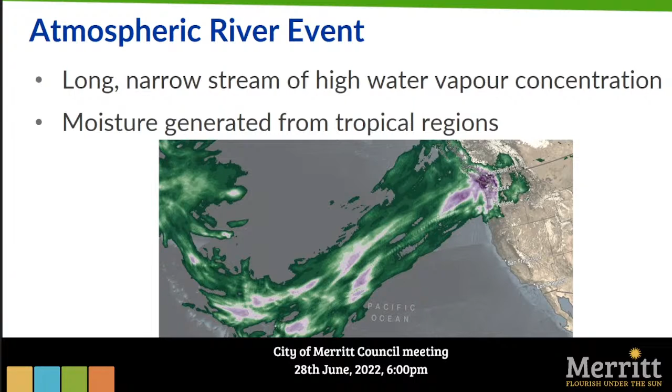There's a recent study from BGC Engineering which is supporting something in that range, and that was the original published value from Water Survey. But since that time, they've reduced their estimate. We've reached out to them to try and find out a little bit more information. We haven't had a response, but all I can say right now is that that's not their final data. So in the future, they will be updating that. Thank you.

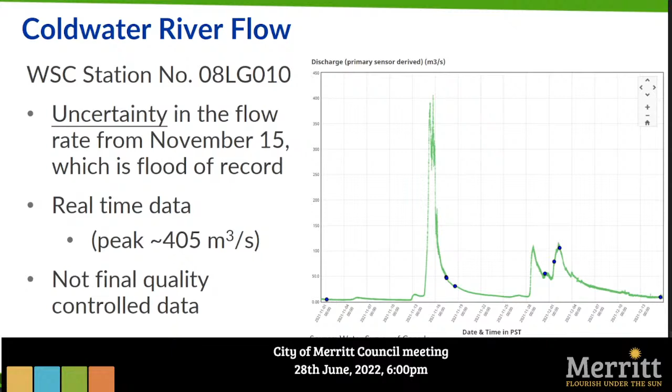Just waiting for this to, sorry, there's a little bit of an online lag, I think.

So even further downstream towards the confluence with the Nicola, that avulsion channel exposed the FortisBC gas main. So this is a critical piece of infrastructure that supplies gas to the entire city. So there were risks associated with that exposure. FortisBC had to come in and do some emergency work. We provided some support and advice on that as well.

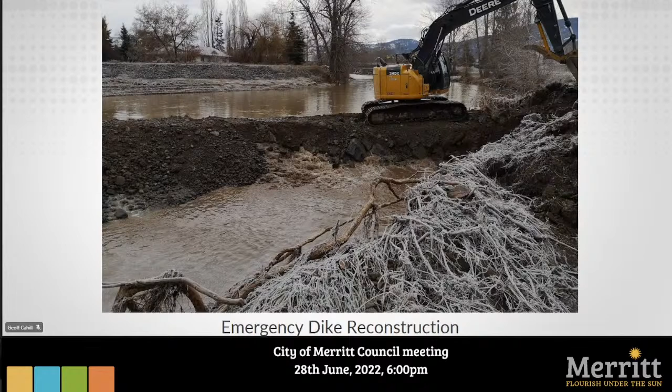So just a quick summary of some of those impacts. So you're obviously all aware of this, but there was widespread overland flooding in the city. There were damages to the water and wastewater systems. There were dike failures, bank erosion. Obviously, there was the bridge collapse. There was extensive damage to properties and buildings, temporary loss of services to the community, and there was an incredible amount of effort put into the emergency response, which I was fortunate to be a part of. And that all led to, obviously, right after November 15th, that evacuation order for the entire city of Merritt.

So just some of our project objectives that we've talked about internally and with the city team. So we want a flood mitigation plan that's going to be robust. We want to have robust flood protection for the future and reduce future flood-related risks in the city. We want to have low capital costs and low operation and maintenance costs. I think the operation and maintenance component is a big consideration, because this is going to be a large piece of infrastructure that the city owns permanently. We want to limit impacts to property as well as to the environment by building this new infrastructure.

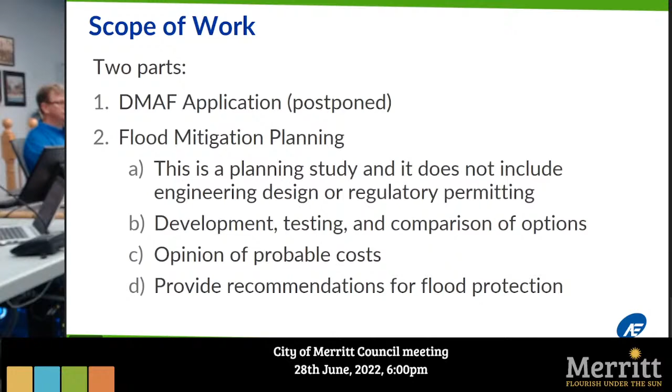So just very quickly on our particular scope of work. So we had 2 parts. So we were looking at funding. So DMAF is an acronym for Disaster Mitigation and Adaptation Fund. That's through Infrastructure Canada, and I'll talk about that just in a second. But then very much related to that is flood mitigation planning. That's what we want to talk to you about today. So this is a planning study.

It's really important. I think Darcy indicated that at the beginning when he introduced me, but it's really important to highlight that, and we're looking at the development and testing of different options that we can consider to implement flood protection in Merritt. Related to that, from the engineering side, we want to come up with an opinion of probable cost. How much is this going to cost to build? And then ultimately, following this presentation and the open house tonight and some of the feedback that we get in the coming days and maybe the next couple of weeks, we want to come up with what our preferred solution is and put that forward.

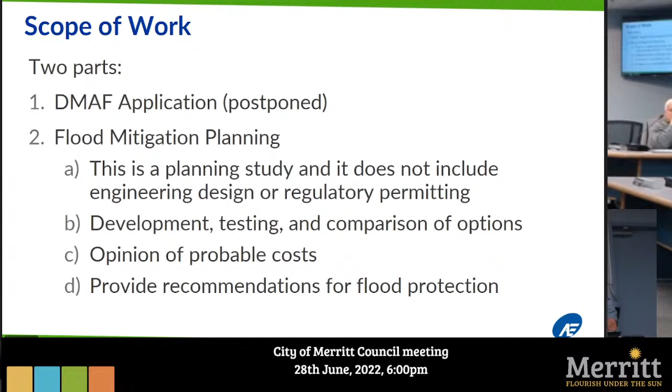So on the funding side, I have a couple slides here just to touch base on. It's really important just because of the scale of this project and the size of Merritt. We are going to need to seek external funding for this. So originally we were looking at going for the Disaster Mitigation and Adaptation Fund. As I said, that's a federal program through Infrastructure Canada. It's a competitive program. The federal government put forward, I think, $2 billion, and then they added another $1.3 billion, so up to around $3.3, $3.4 billion available.

There were 2 intakes. One was in November, and then one was supposed to be coming up in July. But we found out over the last couple of weeks that they have postponed that July intake. So that has had a little bit of an effect on what direction we're going to be going, but I'll talk about that in a second. Have they just postponed it, or have they canceled it? The only information they have is that they've postponed it.

Okay. And we did reach out and we got a generic response indicating that based on the November intake, there was an overwhelming amount of applications. So I think they're just taking their time to review those, and then maybe there's a political decision or a funding decision that they need to come up with. So all I can say right now is they say it's postponed. Okay, thank you.

So very quickly, they have 2 scales, small scale and large scale. I'll present some costs at the very end of this presentation, and we're clearly going to fall into that large scale category.

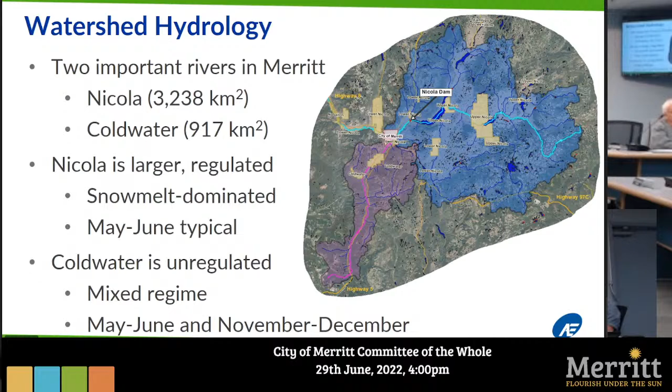Just continuing on with hydrology, so there definitely is a flooding history in Merritt, and that flooding history is on both watersheds. So both the Coldwater and Nicola have had flood events in the past where the city has had to intervene and try and protect infrastructure and people. So we feel from an engineering perspective and a flood safety perspective that the flood mitigation plan definitely needs to consider risks of both river systems.

So for the purposes of our study and the conceptual modeling that we completed, we define two peak or two design flow rates. So for the Nicola River, we're using a value of 130 cubic meters per second. And on the Coldwater River, we're using a value of 533 cubic meters per second. So again, this is for the concept purposes. There's still opportunity to evaluate these numbers, and before we get to detailed design and construction, we do have an opportunity to set potentially different design criteria, be it more or maybe even be it less.

Yeah, so that's kind of the last bullet points there. So as I said at the beginning, there's a little bit of uncertainty as to what the published flow data point is going to be from Water Survey of Canada, and there also would be at least something that we would recommend consideration for watershed modeling as part of the detailed scope of work that could come in the future.

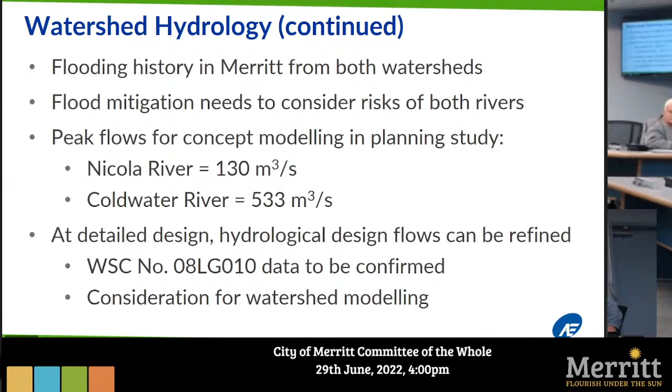So this is just one slide on hydraulics, but I can't understate the importance of this. This is really the meat of the work that we've been doing. So we use a software called HEC-RAS, and we were provided a base model from BGC Engineering. We've adapted that model to develop and test various scenarios and different alignments and different options of flood protection. All of the concepts that I'm going to present to you were modeled, and what we mean by that is we have the topography, the land surface in Merritt, and we can conceptually stamp those dike features in and then rerun the model to test and see how the river responds and really look at the evaluation of how that hydraulic system performs.

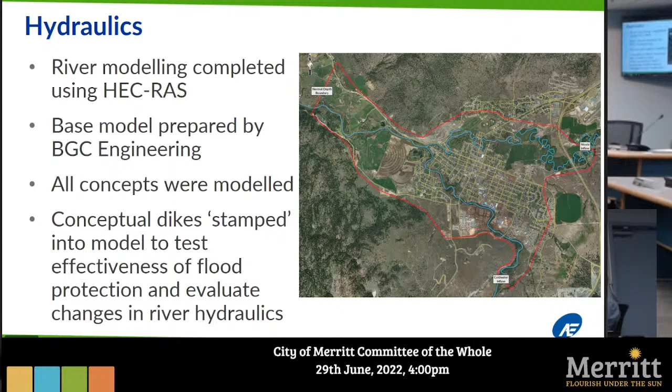So various types of flood protection structures, and before I get into some of these, I just want to highlight that in BC there is a piece of legislation called the Dike Maintenance Act, and I think most people would perceive a dike to be your typical earthen embankment beside a river, but that's actually not the case. So there's a whole list of structures here. I won't read them all, but essentially any type of structure that is installed to prevent flooding of land is considered a dike under the Act. So that's just a really important point to flag here.

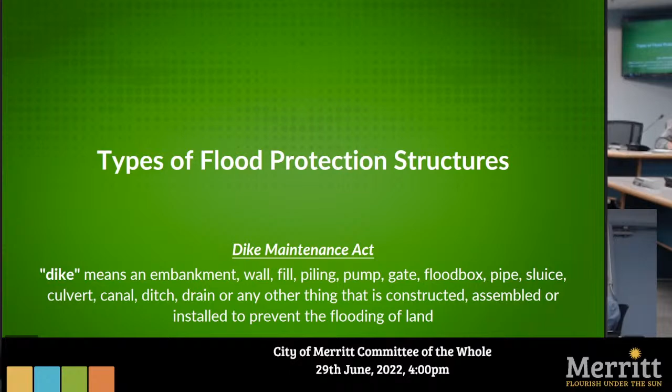So I'll show a few different typical cross sections, and in this particular view we have the river on the left hand side of the image, and then the land would be on the right. So this is what we call a waterside dike or waterside embankment dike. So we have that earth structure separating the land from the river. And these would be placed right on the bank of the river, which is what we have in place right now today in Merritt in some locations.

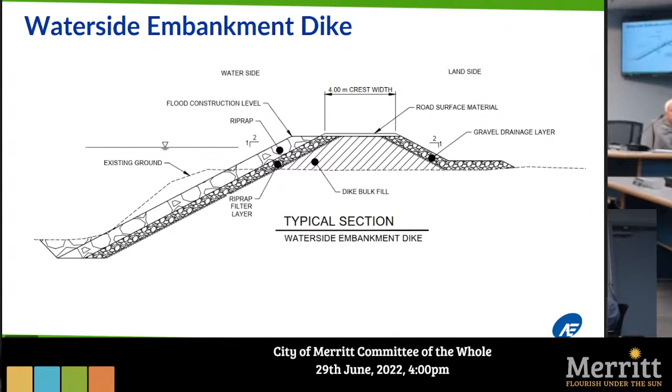Very similar to that is what we call setback embankment dikes. So we have that same structure, but now we take it and we slide it away from the riverbank. How far away can be dependent on a number of different factors, but this type of setback dike feature allows for flooding onto a floodplain, which has a lot of benefits, and is just another type of feature that can be considered for flood protection. But in doing so in locations where there are properties immediately beside the river, this has impacts that need to be evaluated.

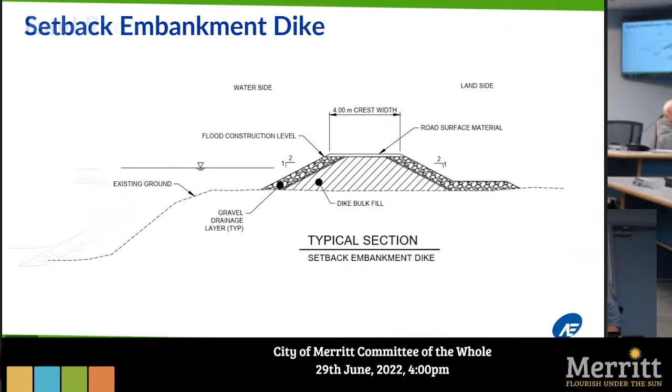And I just want to go over the geometry of what a modern dike would look like. So we can see here various iterations of raising a dike structure. In the bold image at the very front, we have a 2-meter high dike, which would have a 4-meter wide top. That 4-meter width is standard. That's typical for dike structures, which would be necessary for operation and maintenance, but also provide that ancillary function of an active transportation corridor, for instance, or just a pathway for people to use.

So if it was a 2-meter high dike, that would take up at least 12 meters. So every meter that we go up for flood protection, now we're adding another 4 meters. So in this particular image, if we had a 5-meter high dike, the width or the land requirement for that would be 24 meters. What's also not shown here is there's a requirement from the province for dike structures to have a right-of-way behind that dike structure of an additional, I think, 7 or 8 meters. So when you consider existing properties along a river and we look at this geometry from a conceptual perspective, that's a lot of space that we need to build these types of dikes.

And the riverbed is not necessarily anywhere near the bottom of that first piece. Yeah, not necessarily. You're right. On the land level. Yep. Yeah, we could slide that left or right, but that weighs into the amount of land required. That's right.

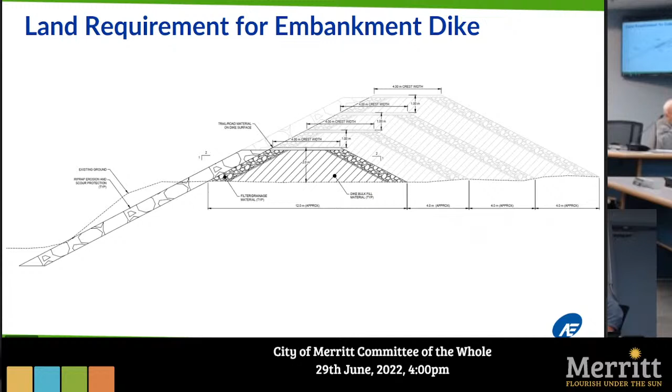So another alternative form of a dike structure is a sheet pile dike, or we could call it a narrow dike if it was another form of a wall system. In some locations where we have limited space or complicated areas, we can consider this alternative. In most situations, this type of structure is going to be more expensive than an earth embankment, and it's also harder to own and maintain over the long term. In addition, because we now have property on the back side of the sheet pile, we're isolating the river. And as we saw from the public survey, there's a lot of value for the residents to have that access. So these types of systems, although they're used in some situations, can have an effect of isolating the river from the city.

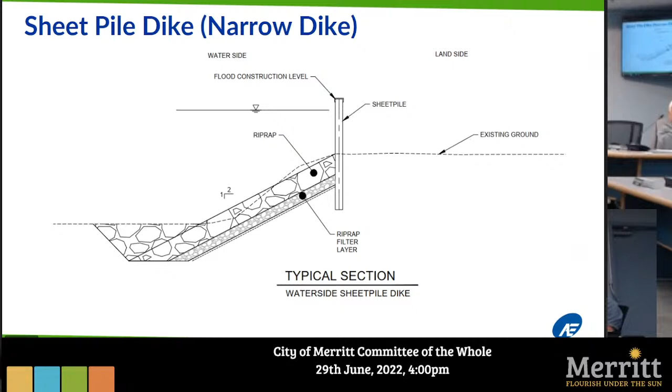So this wouldn't be a dike, but there could be many locations where we just consider erosion and scour protection. This is going to be your typical rock riprap that we would place right on the bank to protect areas that are prone to instability. So we don't need to have an elevation requirement in this particular example, but it still provides that function of protection.

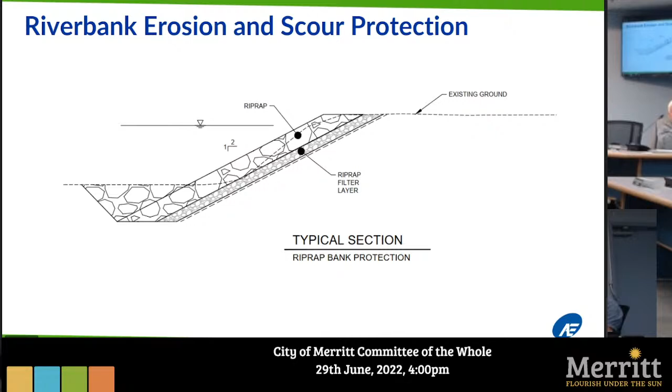So other types of flood protection structures we could consider: there's road raising, which we could call a wide dike. In some instances we can raise the elevation or the profile of a road to provide that same function as a dike structure. Drainage pump stations, which are likely going to be considered in Merritt, because when we build these linear features along the river or set back from the river, now we're cutting off that overland drainage route. So when it rains in the city, now that water has nowhere to go. So in some instances we do have to consider pumping that water out.

Bridge replacements is definitely tied to this. It's not necessarily a flood protection structure in and of itself, but when we have dikes that are coming up to these road crossings and we potentially have flagged deficiencies or capacity issues with some of the existing bridges, now we have to start looking at that as well.

One of the things that we saw from the commentary portion of the public survey, and a lot of people did comment on this, was the idea of dredging the Coldwater River. I'll talk about that on the next slide a little further, but we did have the benefit of having some recent survey data on pre-event and post-event. So I'm showing two graphs here. The lighter dashed line is the pre-event at particular locations, and the darker solid line is what was measured just this spring, so after the event.

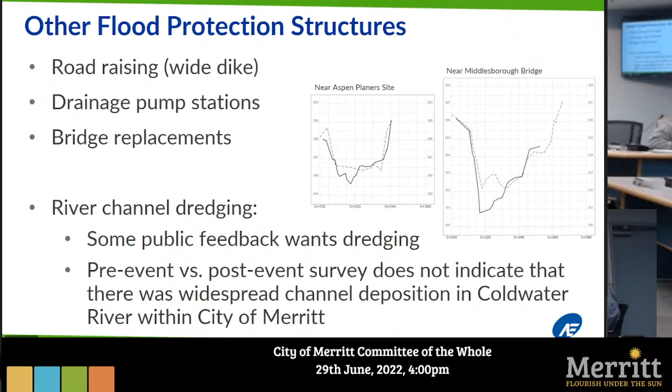So just some commentary on river channel dredging. So this wouldn't be considered a flood protection structure. This wouldn't be a dike. Sediment removal can be used as a management tool, and in some instances there are cases where that is done. But we consider it a temporary measure, and it would require ongoing work. And that has costs associated with it to do that periodically.

But dredging in general can actually cause adverse impacts in other locations. So we can actually destabilize banks. We can cause erosion in other locations. And perhaps one of the most important things is when we do channel dredging, there's a loss in habitat. And sometimes that can actually be permanent loss in habitat.

As I said, this can be expensive, and when we consider the length of the Coldwater River or the Nicola, but particularly the Coldwater River flowing through Merritt, that's a lot of area to dredge on a periodic basis. And if it's not a flood protection structure, there's probably not a whole lot of funding out there for it. That would be my guess. I think that's fair, yes. I think I would agree with that. Yep.

So it may not be a practical solution. I think it can be considered in some locations, and I'll show that on the maps in a second. But it may not be a sustainable solution over the long term. And lastly, there's regulatory agencies that may discourage this type of management option.

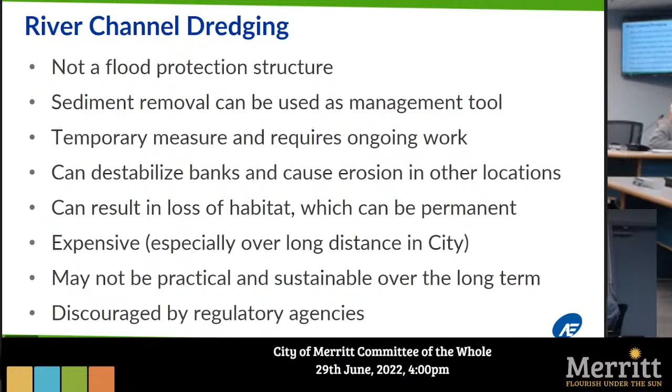Okay, so let's get into the conceptual options that we've looked at. So we have 6 options that we'll show you. We've listed them here. So option 1 is status quo. Option 2 is a full retreat from the floodplain. Option 3 is what we're calling waterside diking. And then option 4, so we have 4A, 4B, 4C. These are combination diking, so we have waterside and setback. And again, I'll just reiterate that these are conceptual level for planning purposes, for evaluation of different options, and we're using them as a tool to seek funding for implementation at a later stage.

I'll also say that the first 2 options kind of set the bounds. So status quo is do nothing, and that's likely not a solution we're going to consider, but we're including it in this list. And then on the other end of the spectrum is the full retreat from the floodplain. And as you'll see in a second, that has severe consequences, and it's also likely not a solution we'll consider. So we're weeding it down to 3 and then the various 4s.

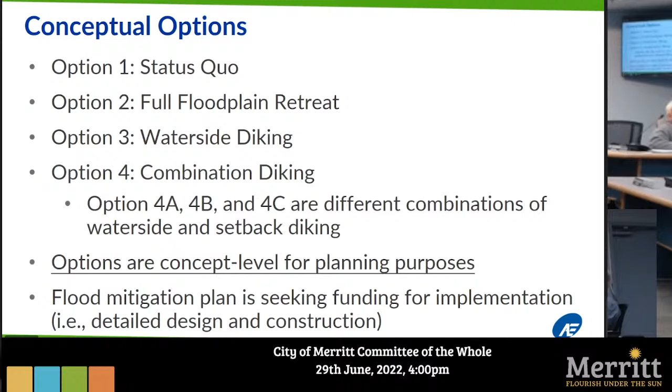So option 2 is essentially showing the same flood inundation extents, but now we've overlaid the properties that have the most impact from the flooding. So those are shaded in red. And in fact, there's now over 1,400 properties that we've identified as being impacted. So a full retreat from the floodplain would have very severe consequences for Merritt.

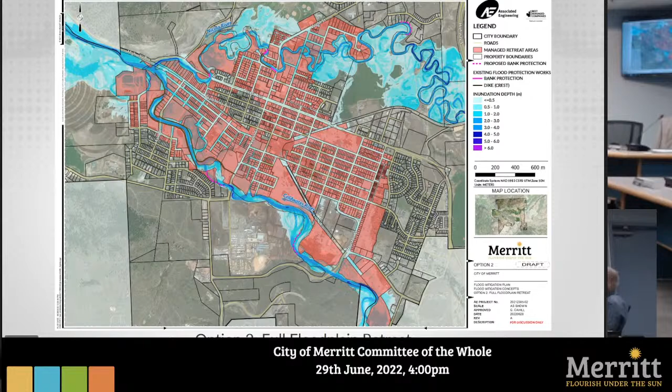So what we would probably see, and I'm just speculating at this stage, but because we have this constrained river system flowing through the city, there might be some sediment impacts or erosion impacts that could occur downstream. But that is something that we'd have to investigate a little bit further.

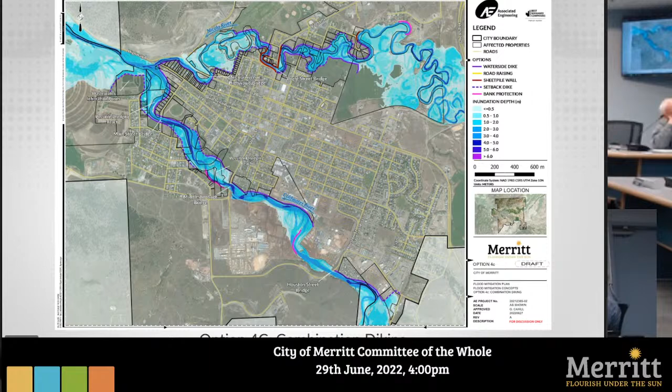So I just want to highlight a few of the more challenging areas for flood protection, just from a technical perspective. As we've gone through this, we've identified a few areas that are going to have more constraints, more limitations on designing flood protection.

So this first corridor is on the Nicola River, so Voght Street, 1st Avenue, and 2nd Avenue. We've identified that the bridge may not have enough capacity for this level of flow, and in doing so, if we look at bridge replacement, road raising, now we have driveways and intersections that need to be changed. There's some pretty challenging areas. We also have Lions Memorial Park. So coming up with a scheme that's effective and has limited impacts on property in this particular location is going to have some challenges.

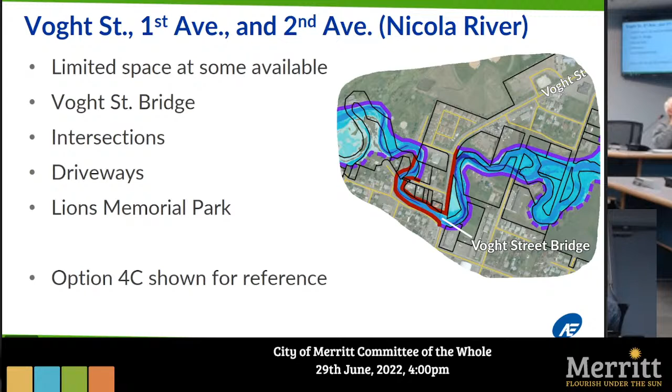Just downstream of there, still on the Nicola River, is the corridor with the golf course, Eldorado Park. We have Highway 8. Similarly, this bridge, which we understand is owned by the ministry, is also potentially undersized. So, this is also a complicated corridor with different jurisdictions here. So, there's some tough decisions that need to happen along this area.

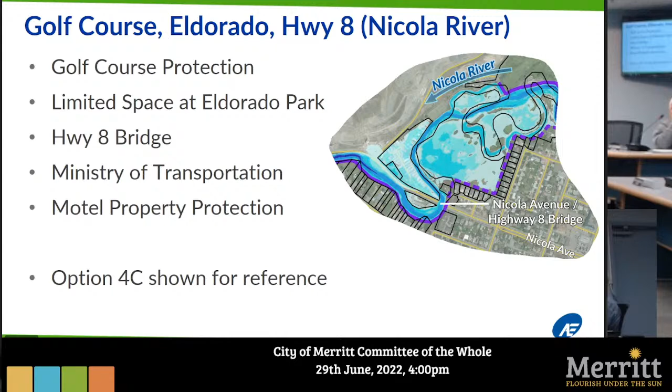And then the last one, which is going to be no surprise to anyone, is the downstream end of the Coldwater River. So starting at Main Street Bridge, again, another bridge that is probably undersized. We have the properties immediately north of the bridge. There's the sewer lift station just on the other side of the river. The properties that were damaged on Pine Street, the wastewater ponds, the gas main. There's a lot going on in this area. So looking at options of flood protection, there's going to be a lot of considerations here.

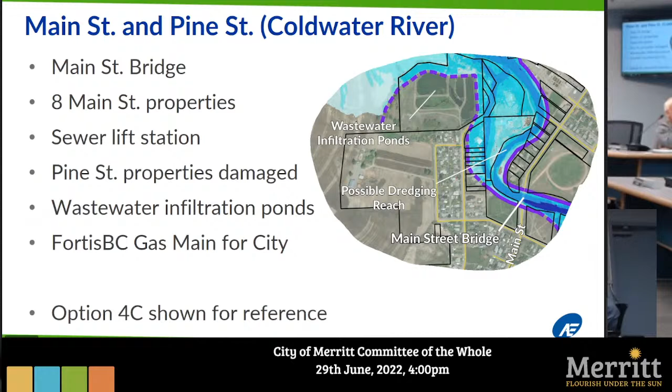If we do nothing, and another flood event happens in November or next freshet, we're estimating that there could be damages and costs in the around $500 million range. So we've estimated $445 to $580 million. Option 2 is the most expensive option, which is probably not surprising if we look at retreating entirely from the floodplain.

Obviously there's a large amount of properties to consider, and then restoration of all that area. So we have a very high number associated with this, so 587 million to 764 million. The waterside diking option, we're estimating that the cost for that could be in the range of 135 to 176 million. And then the various options 4A, 4B, 4C, 121 to 168 million.